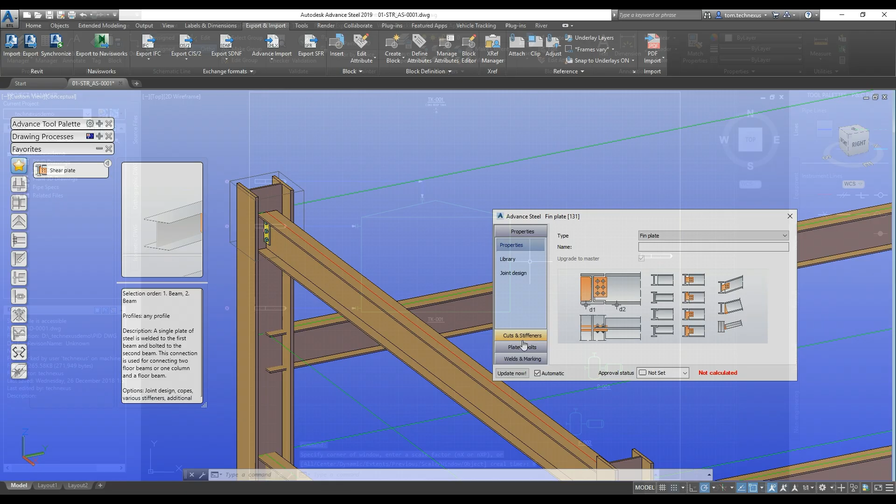So this week is all going to be about piping. We're going to finish off our piping models by the end of the week. We're going to create our fabrication drawings for them. We're going to update our orthos, run them through Navisworks and make sure we're not getting any clashes.

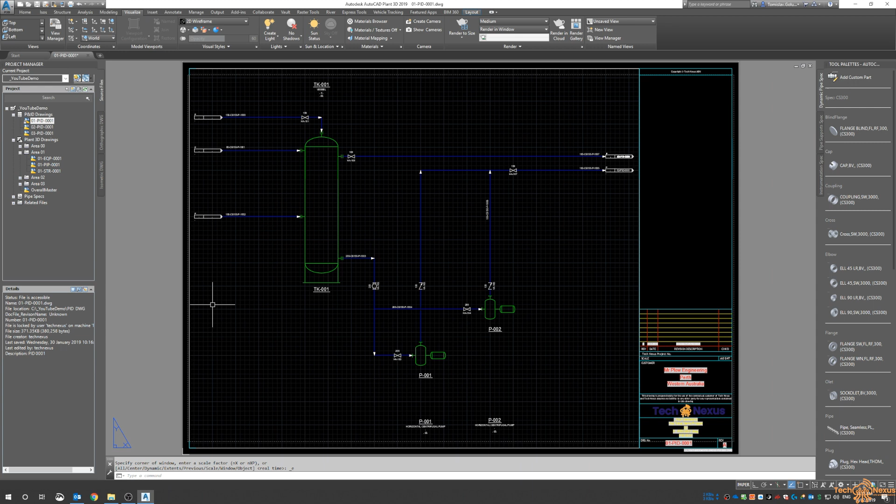And then by the end of the week, we will also update our InfraWorks model just to make sure that it looks right visually where it sits in its real-world location, possibly. So today is all about Area 1. We have our TK001, you can see there on the screen, with Pump 1 and Pump 2. So Pump 1 and Pump 2 have 8-inch suction lines at a spec of CS150, and the pumps are discharging 6-inch lines at also a spec of CS150.

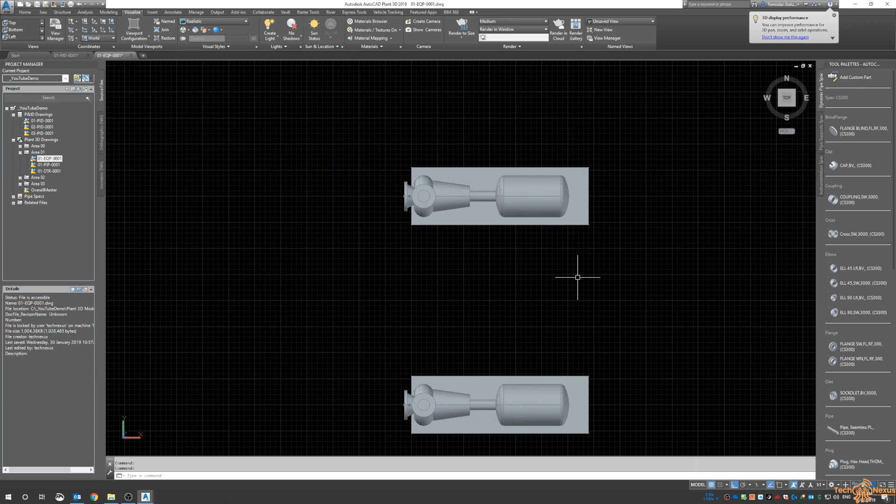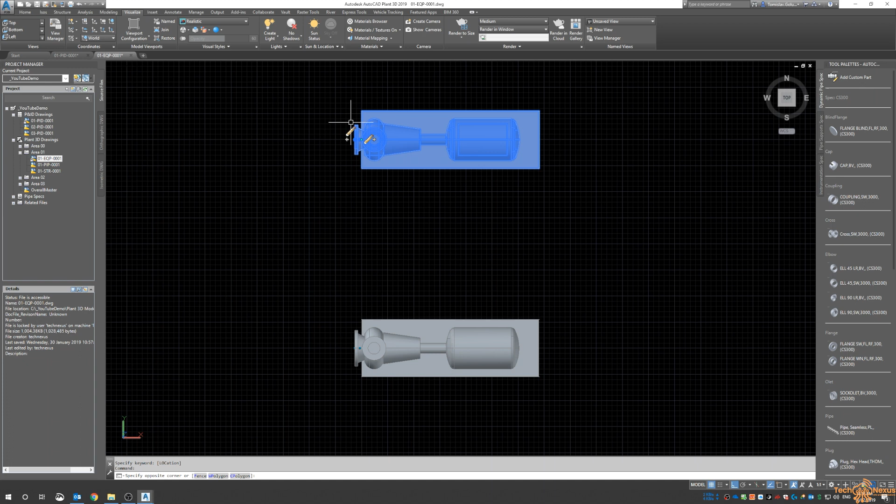So we go into our Area 1 equipment model, and there it is in plan view. So we can just zoom into our pumps here, and we can edit the nozzles. So when you do edit the nozzles on Plant, you select the pump and click on the Edit Nozzle tab, and then we go to our, it was an 8-inch line, CS150, and we have to pick the nozzle. Otherwise, if you don't, it doesn't actually change. So same thing for pump number 2. We call it a 200.

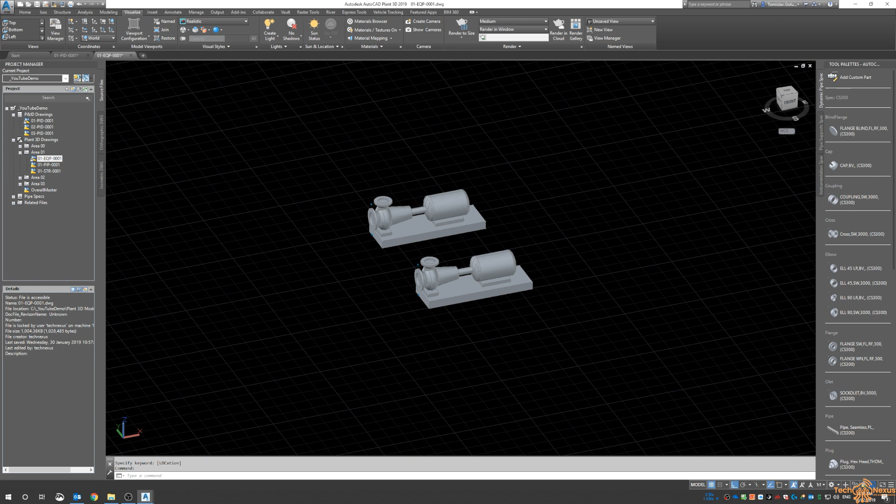And then we do the same with the discharge lines. So they're going to be 150s, raised face. And then the same for this one. They're going to be 150, raised face. So there's our two pumps there with their respective 200 suction and 150 discharge.

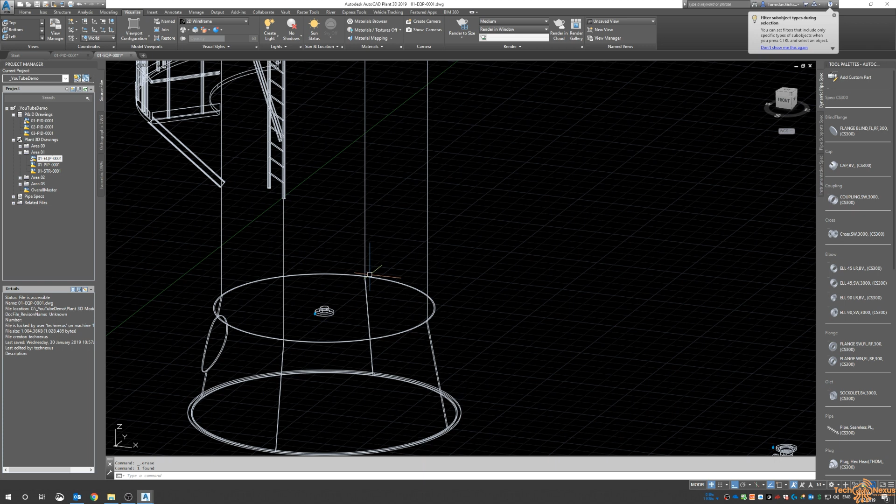Now with the tank or the vessel here, I'm going to change it to wireframe just so you can see. So by default on some pieces of equipment, Plant may or may not place just a couple of nozzles just to start you off, I guess. But we're going to delete those for now because I just want to start from a blank slate, so to speak. So I can control and click the nozzle and I get the little pencil glyph, and then I can just use the delete key on the keyboard to delete it. So also with this platform, I'm not really interested in this at the moment, so I'm just going to remove it.

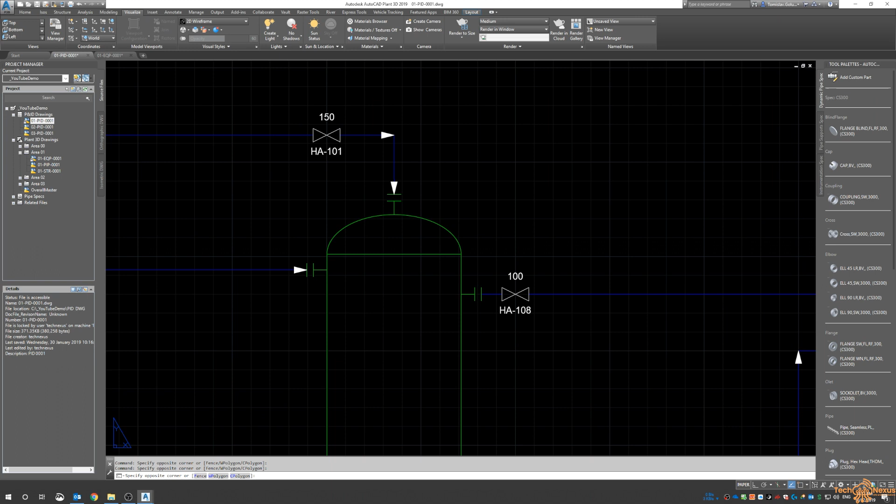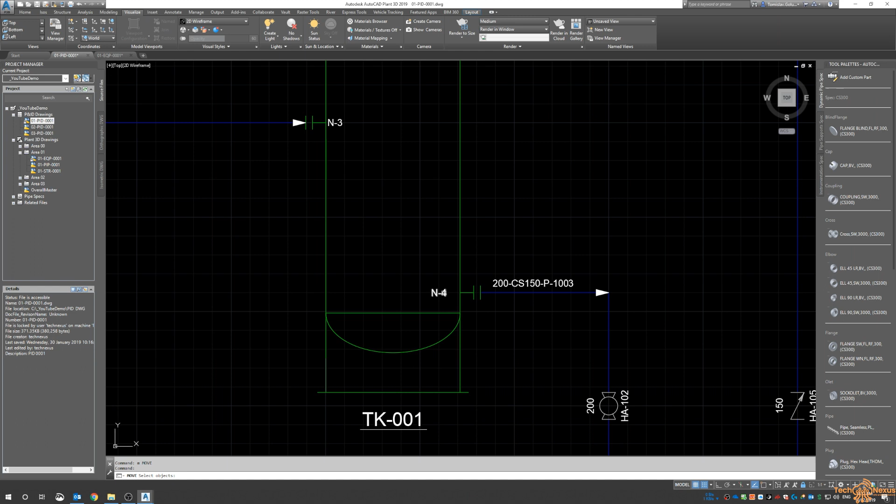So if we go back to our P&ID, we can see that we have 1, 2, 3, 4, 5 nozzles here. So I can also come in and annotate them, and then I will know which nozzles we're dealing with. So N1 is at the top, N2, N5, so these will presumably be N3 and N4. So it looks like I'm obviously just doing nozzles to my own numbering. So when you do get an equipment data sheet, these may already be numbered. So from the vendor, they will know that they're N1, N2, whatever.

Also, generally, you might find, depending on the process and whatever project you're working on, the nozzle elevations will be set, but in plan view, the rotations won't be set because that'll be something that you may decide as a designer, that you want the nozzles to be at 45 degrees, 30, 22 and a half, whatever it might be. So with this, we've obviously just got 5, so 4 on the body, 1 on the top, and when we jump into the 3D model, I will sort of work out where I need them.

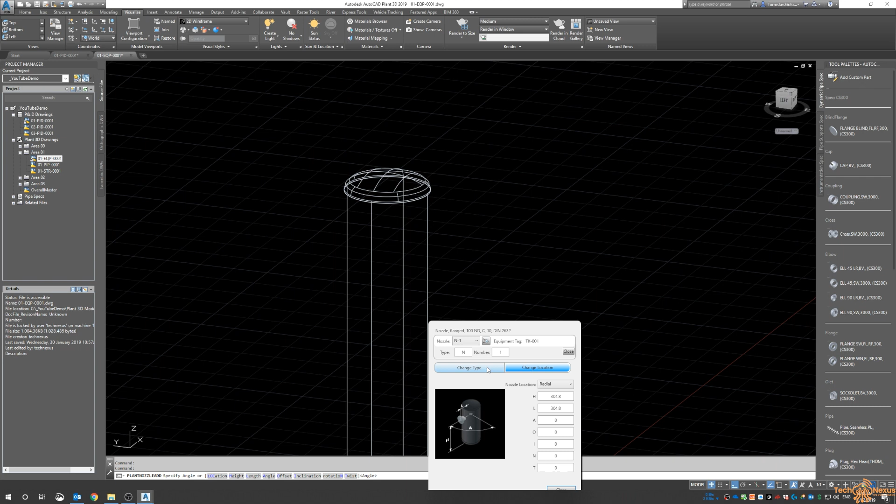So N1 is at the top, and it's a 6-inch CS150 line. So in Plant, you pick the item, right-click, add nozzle, and it's a top nozzle. So the O value, which is the offset, is 0 because we want it in the center. The length, I'm going to make it just an even 250. And it's going to be a 150 and a pressure class of 150 as 6-inch raised face flange.

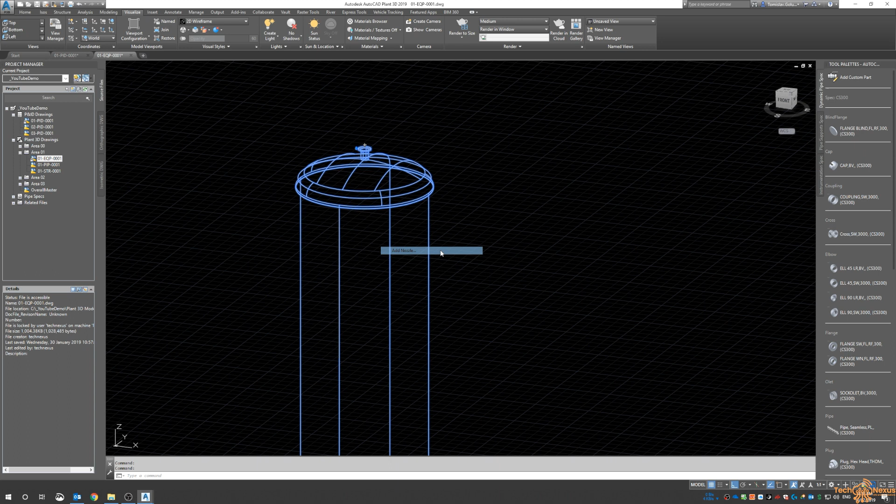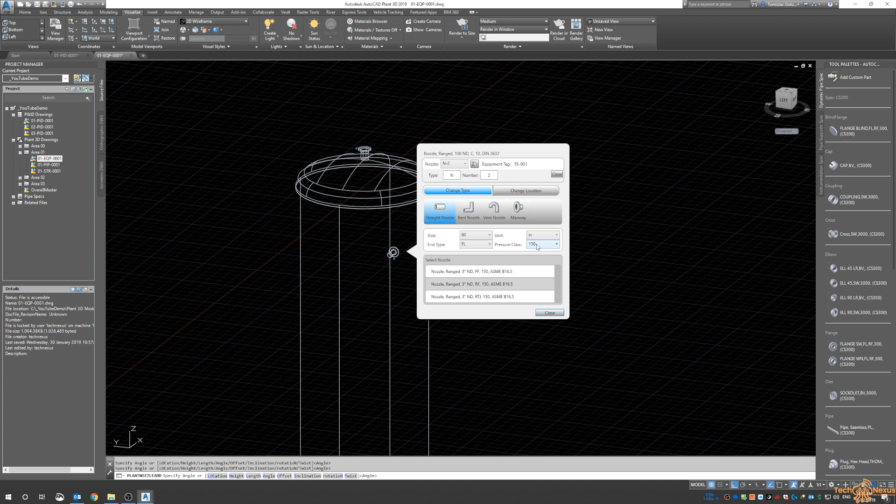So there's N1. So if we go around, N2 is an 80mm line in CS150, and it's near the top. So it's radial, so the height, let's start at 18 meters. Looks good enough for now. And the L, which is the extension from the face of the body to the face of the nozzle, is at 250, and then we know it's an 80mm CS150 spec. Okay.

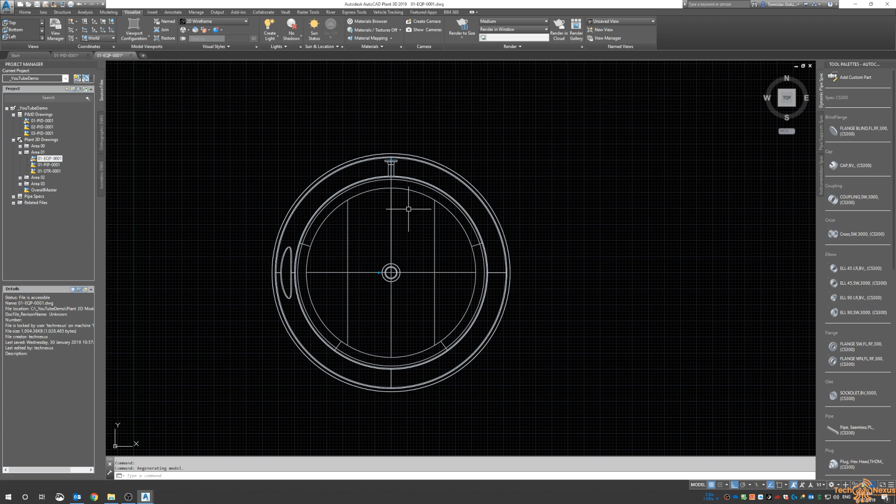N5 is a 4-inch line at CS150 as well, and it's near N2 at the top there. So again, we'll do the same thing. I'll just switch to top view as well. So you can see there's N2. And if I switch to the side, there's N2. So again, I might just modify this just to bump it up a little bit higher too. So let's go to, what does 20 meters look like?

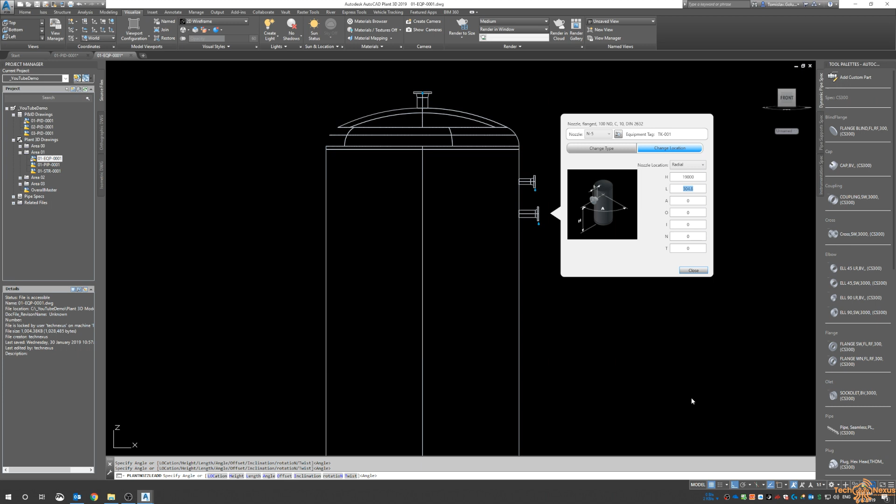Again, you'll be doing this from a data sheet off the equipment vendor. So these should already be set for you. So that looks about right. And then we'll go to N5 and radial again. And this was at 19.5, so N5 is a little bit lower, so we'll make it at 19 meters, 250. And let's push the angle around 180 degrees for now. And this was a 4-inch line at CS150 as well.

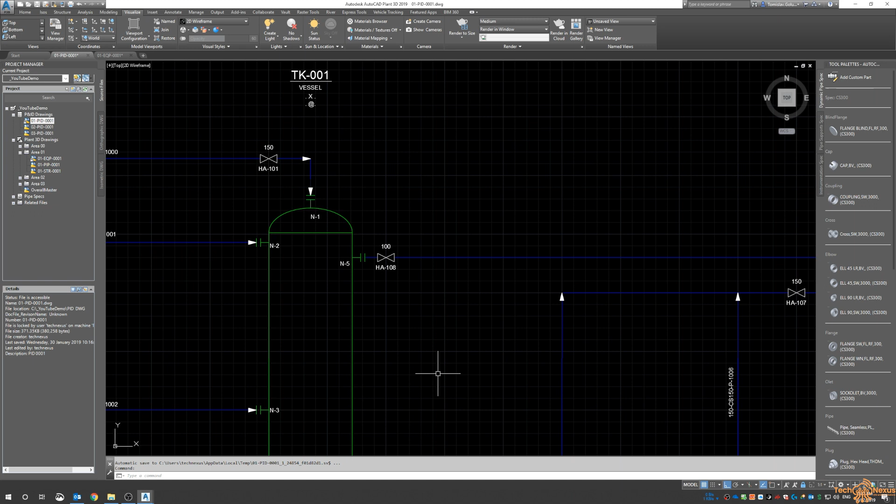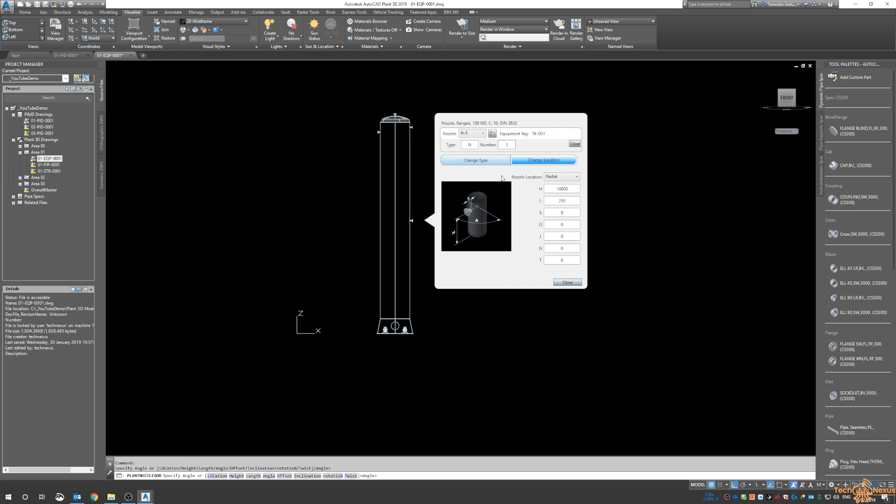So there's 3 nozzles, and then we've got down the bottom N3 and N4. So N3 looks like it's, I don't know, almost halfway up. So it's a 4-inch line at CS150 as well. So N3 will do the same. Add nozzle. Height, let's make it 10 meters. L of 250. N3, and it was a 4-inch line at CS150.

And then N4 is my 8-inch line, which is down towards the bottom of the vessel. So this one shows it as close to the bottom there. It could also be a drain at the bottom of that spherical head there too. So we're not going to do that. So it's going to be add nozzle somewhere down

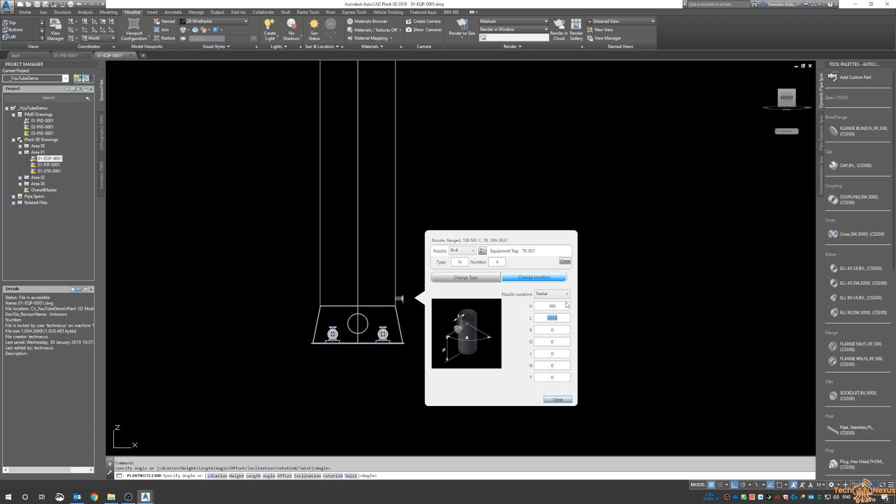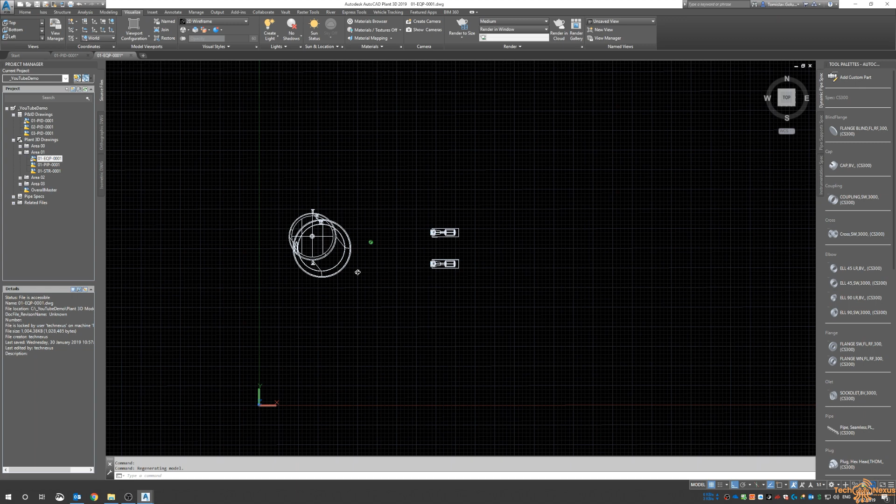300. Let's make it an even 300. Protruding 250. Change type. It's a 100 mil line. Changing the unit to inches. And then there we go. So now with the orientation. So that looks okay for now. But again, we know that this bottom nozzle should be rotated at some point.

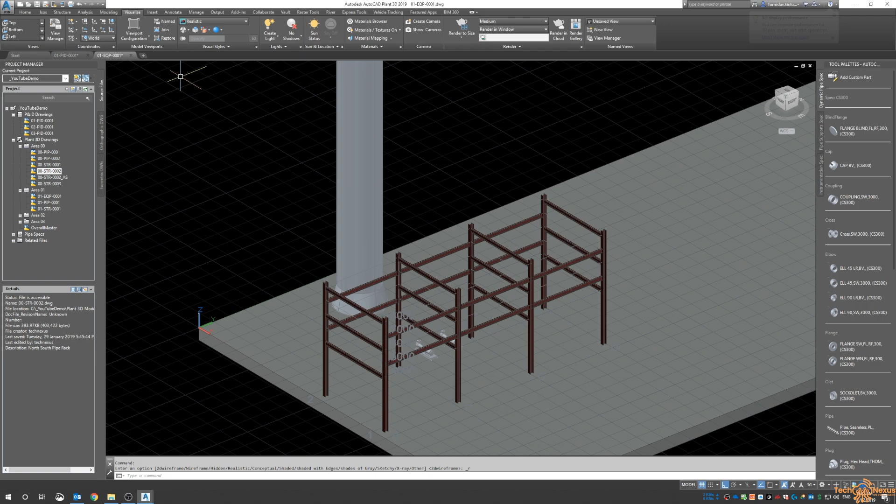So what I want to do is, just to get an idea on how this is going to look in its location, I'm going to XREF in the structural models and then switch to realistic or conceptual. Conceptual looks nicer. There we go. So we've got all of these nozzles up here. So this one is obviously going to be okay. So it's going to come down and get onto the pipe rack.

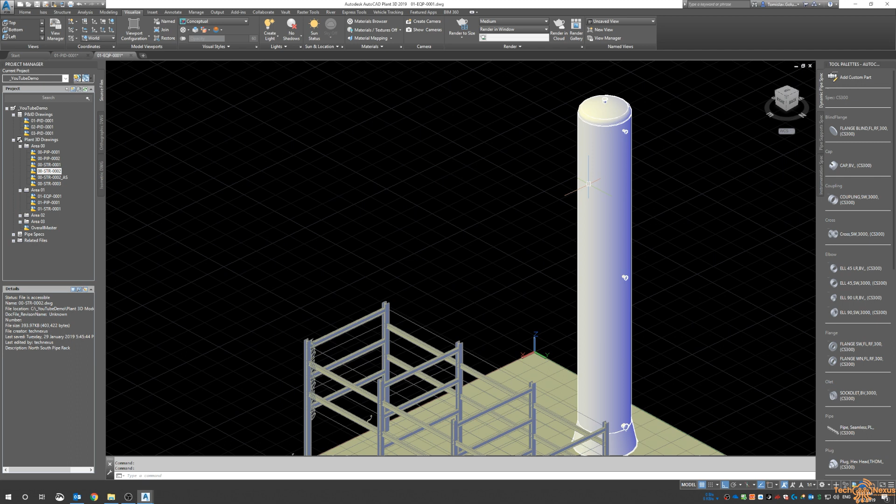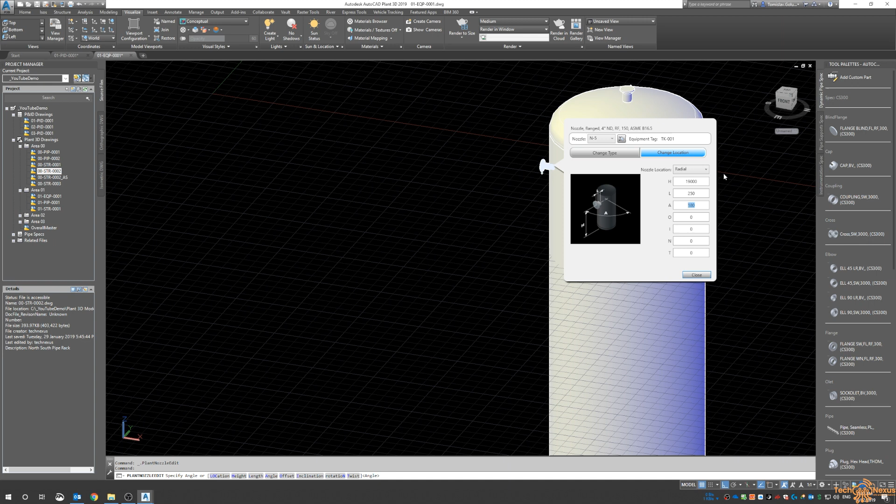These 1, 2, 3 nozzles, we could probably orientate them to be a little bit more accessible to get in and off the pipe rack there. So what I'm going to do is I'm going to change this one to be at an angle of, let's say, minus 60. Okay, that looks pretty good. And then we'll do the same thing for this one. So that will be 60, 90 plus 30, 120. Wrong way. So just come back and change it. So that will be minus 120.

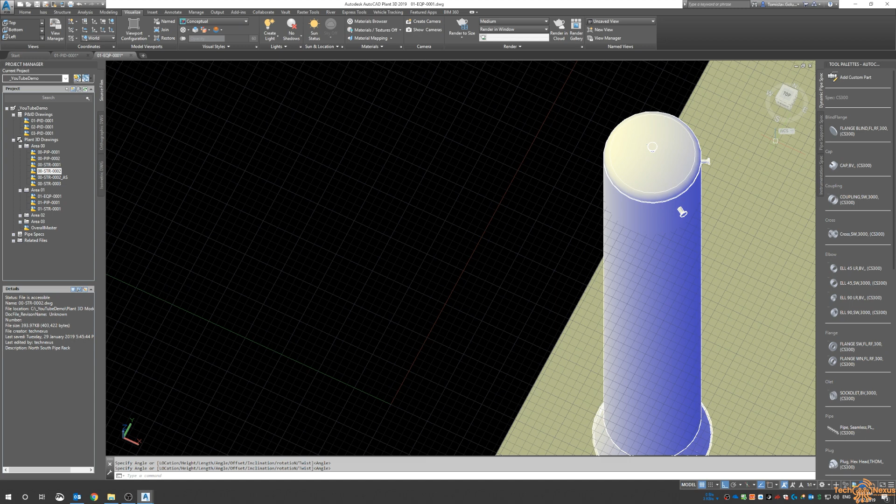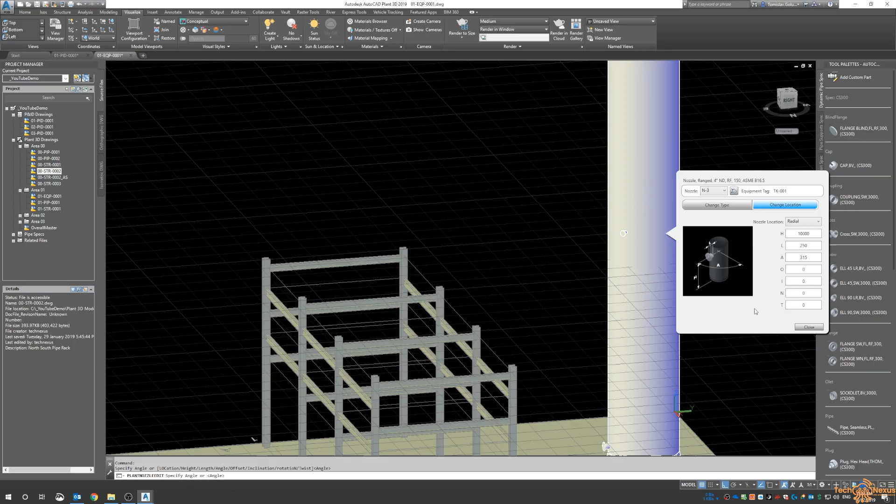There we go. So looking from the top, we've got 2 lines coming off here, and then what we might do is for this bottom drain, same thing, I'm just going to rotate that back around minus 90 degrees, and then let's do this one just for something different, minus 45 degrees. So they're all facing back towards the rack. So for now, in my head, that looks fine. So I'm just going to detach those XREFs again. I don't need them anymore.

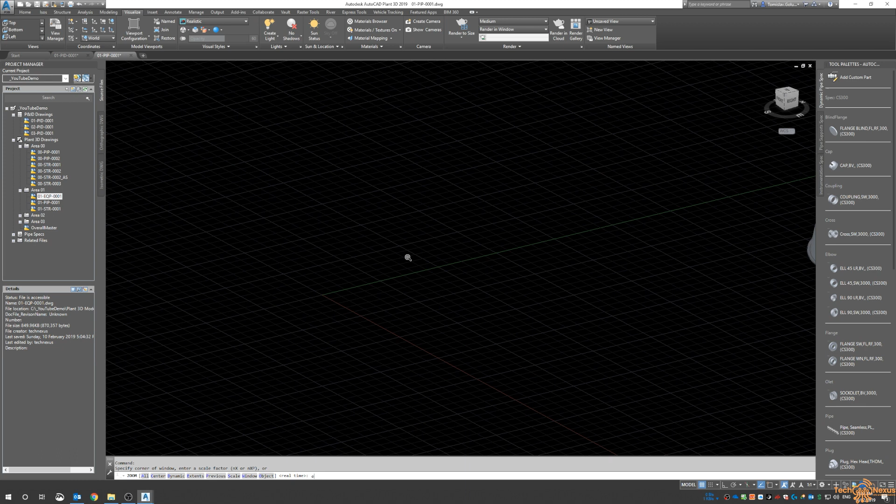And then we're going to jump into the Area 1 piping model. So obviously it's blank, nothing in there. We need to XREF into the current drawing my equipment model, and I'll switch this to be conceptual again, and I'm also going to XREF in the general structural model just so I get an idea on what it's going to look like.

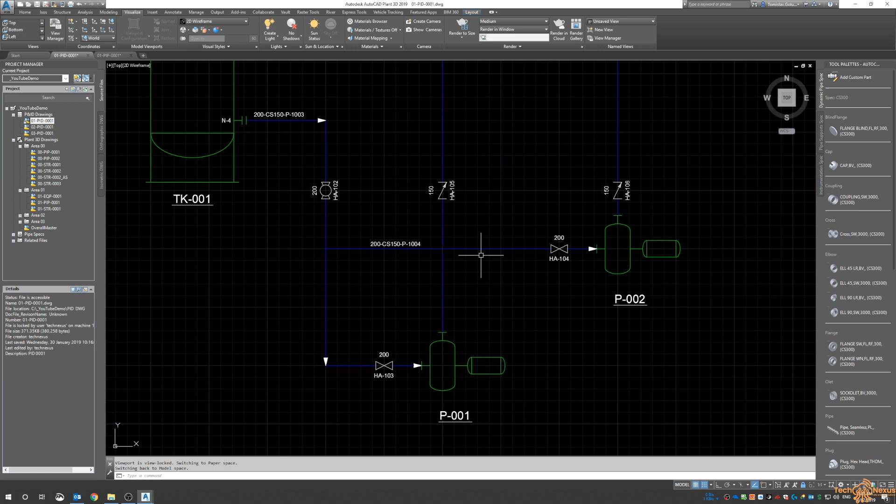So to finish off this video for today, I'm just going to do this suction line, so the drain from the tank going into these pumps. So I know that it's the 1003 line and 1004. So pump 1 has 1003 attached to it, and pump 2 has 1004 attached to it. So which one's which? We can come in here and see that this is pump 1 and this is pump 2, and there's that discharge line.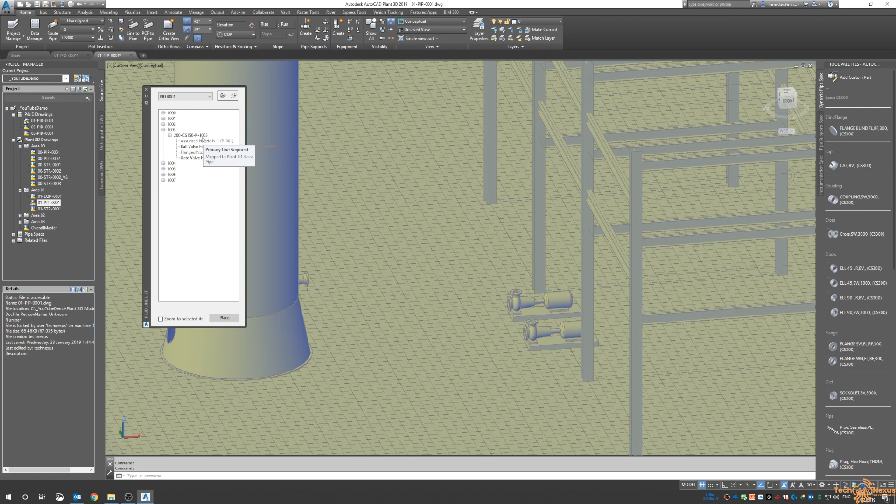So I go to the Home tab, and in the middle, next to the size, there's a button called P&ID line list. So I can pull up that 200 CS150P 1003. So I right click on it, go place. Plant will ask you to map the 200 size in the spec. And then we can run it.

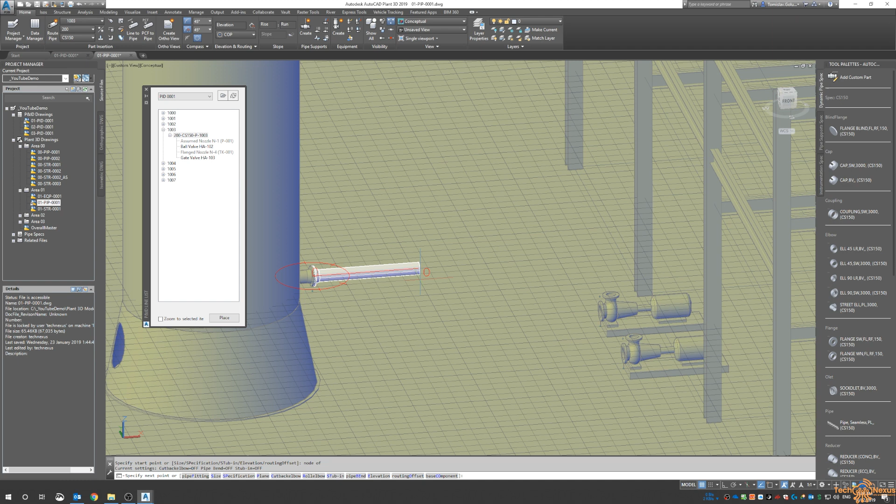Now everything in Plant is a node connection, not a center. So we go from node to node of the pump. And what you'll see there is Plant has got 9 different solutions for that. So down the bottom of the screen, we can go next. So we're at option 3, option 4, 5, 6, 7, 8, 9, and back to 1. They're my 9 options. I like option 1, and I type in A to accept.

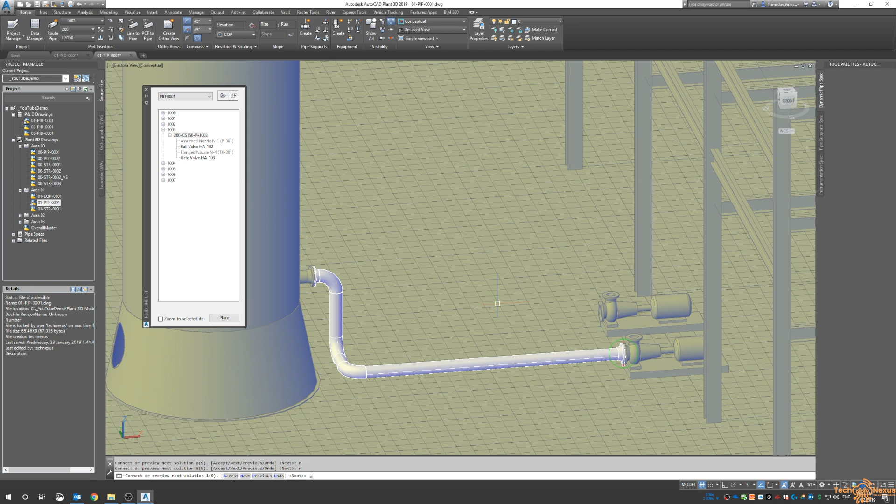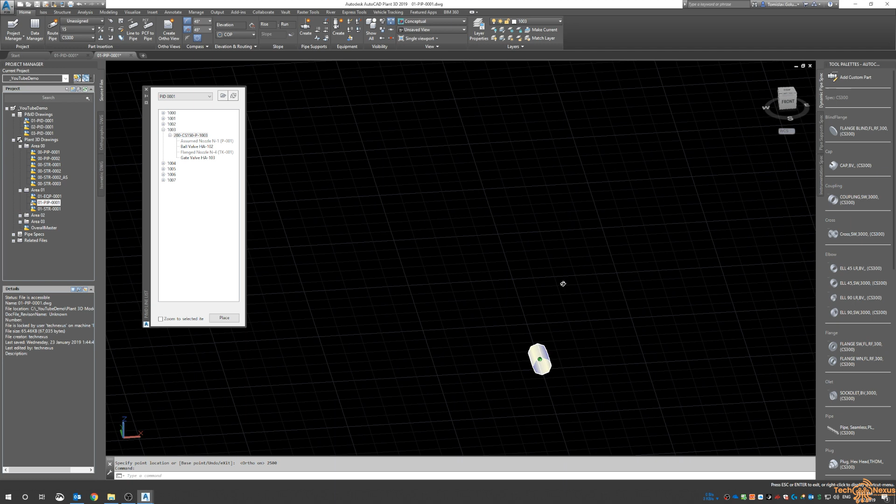Now, this is not gospel. If you want to move it, what you can do is delete one of the fittings, and then I'm going to bring this down. So I'm going to shift this, let's go 2500. So now I can do the same thing. I can just come back and reconnect this pipe. Okay. So to me, at the moment, that looks fine.

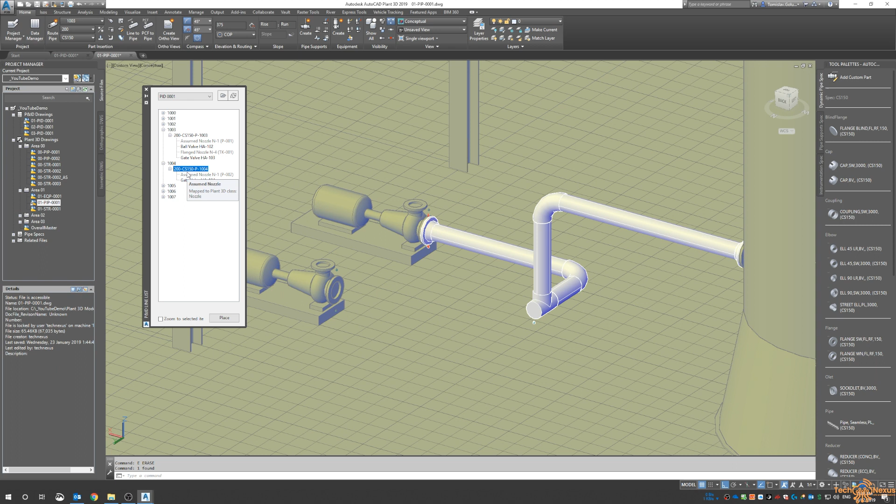Now we need to put the 1004 line coming off here as well. There's a couple ways to do that. I like to change the elbow to a T, and then that way that T is part of the 1003 line, and then I can run the same command. So place item, and then go node to node, and there's 2 options there, but I know that's the one that I want.

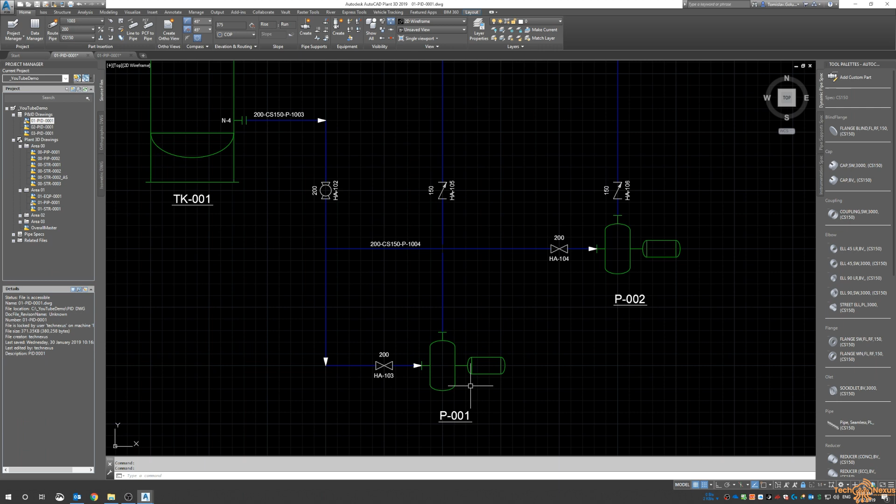You can see there now we've got our discharge line coming out of the bottom of the tank, splits up into 2, and then we can start placing our fittings, our inline fittings. So we've got a ball valve on the main line, and then each of the pumps here have gate valves on them. So again, you just go right click on it, place item, and for this exercise, I'll stick it in the horizontal up here, and the valve operator is up.

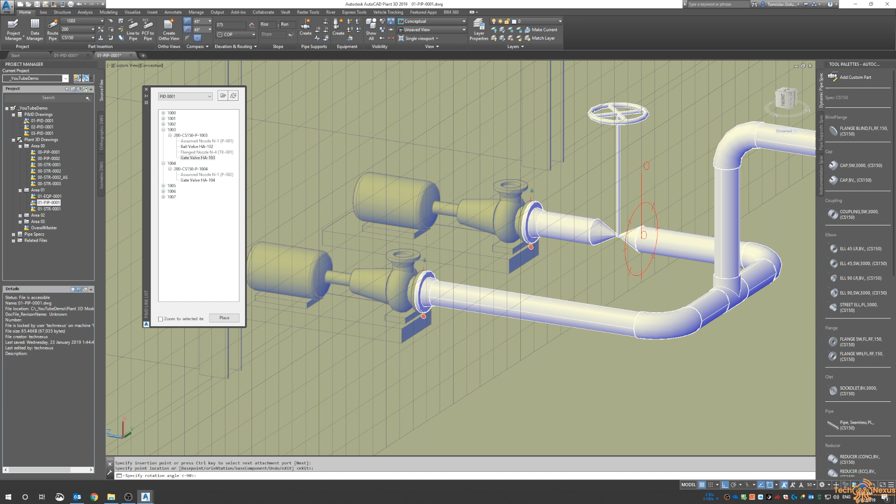So all of this will check and change possibly even later as well. So for 103, the gate valve, it's going to go up, and for 104, the gate valve, it's going to go up there as well. So we know that this spec has 2 different end ratings for those valves, so I'm going to change them to be flanged valves. Your spec will probably have these already set up as well.

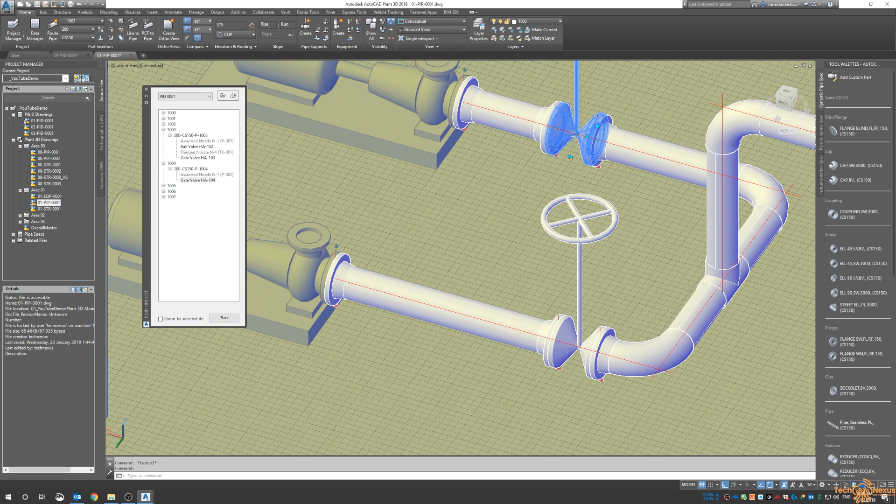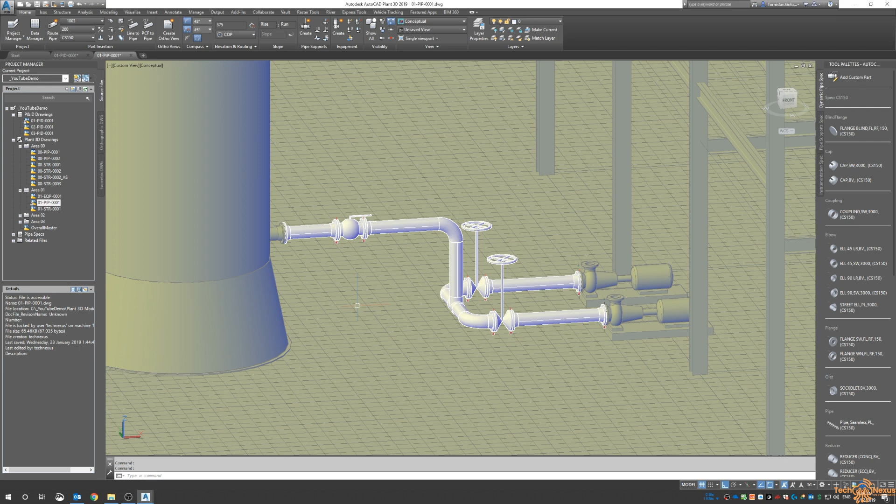And just to make things look nice and neat as well, let's say I'm going to move this down, and Plant will automatically just drag the valve down as close as it can, and then place the flange hard up against that elbow there. So again, this is not gospel. This will evolve in time as I get more data in regards to access, if we need to walk around it, do we need to change it, and whatever else.

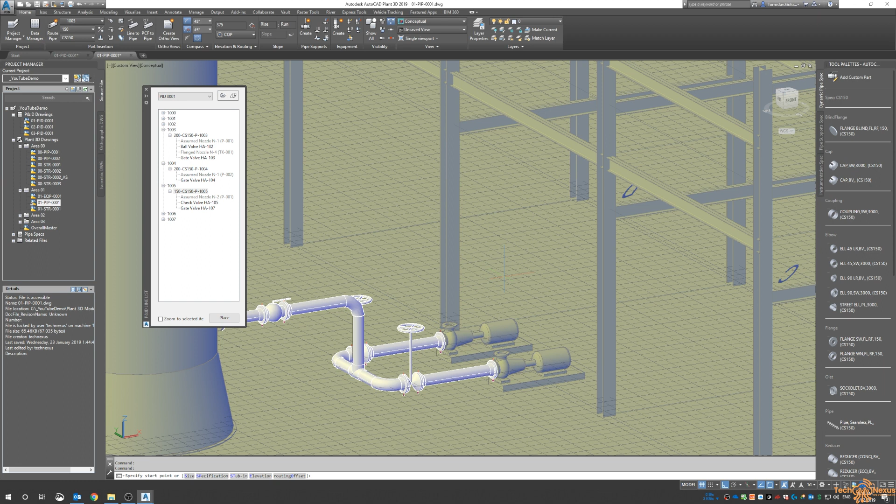So just to finish off this video, we're going to do the 6-inch line. So coming off pump 1, we have line number 1005 and line number 1006. So pump 1 has line number 1005. So this is the way I like to do it, is place item. So again, we're just mapping that 6-inch line, and type in node for discharge, come up, and again, you don't have to do it this way, but this is how I like to do it, and I arbitrarily place these lines in some area that I think I know where they're going to go.

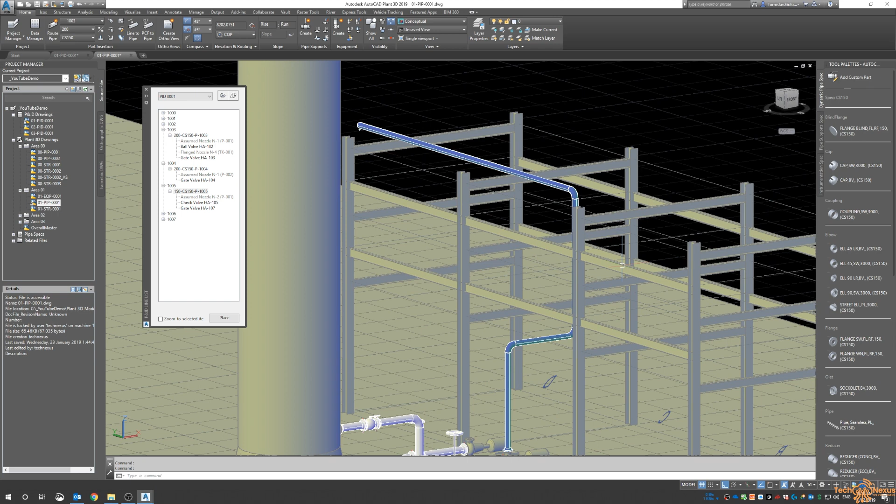Okay, the reason for this is because in Plant, if I get an idea of the level of this steel, the steel's sitting at an elevation of 5,000, so 5 meters up. I can click in here and click on the elevation tab there, and I can also drag it up. If I zoom out, I need the dynamic inputs on.

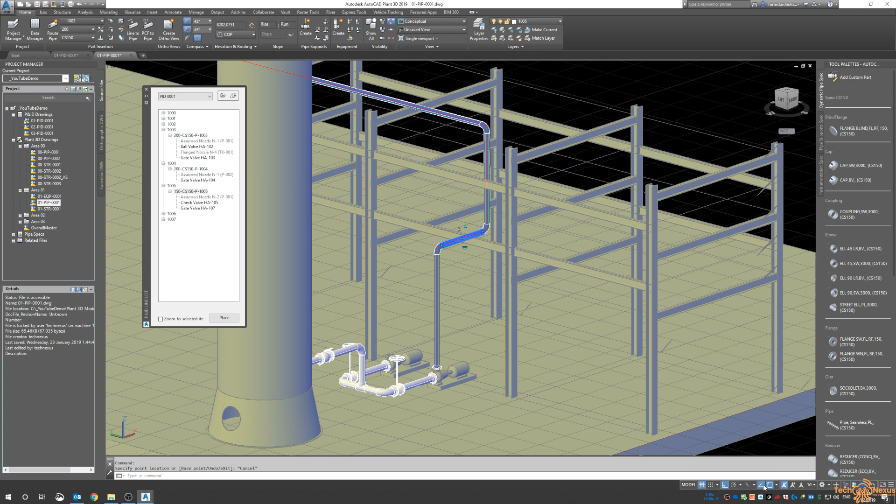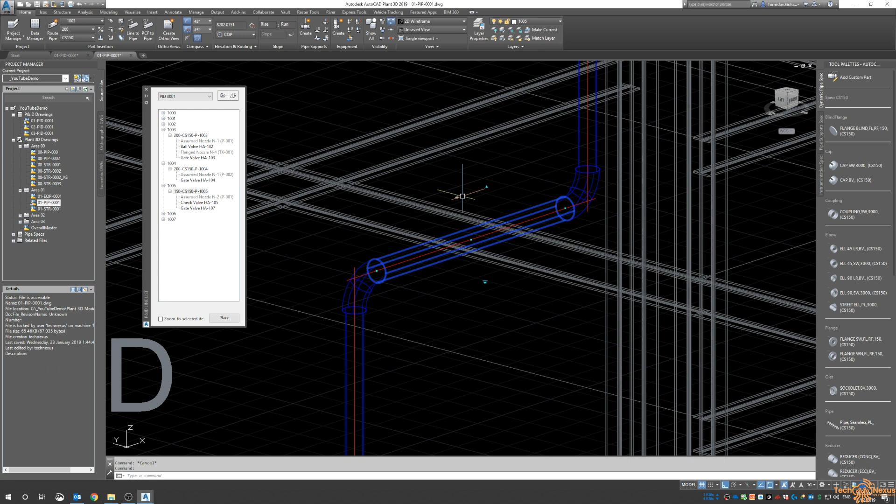Where'd it go? Where did my dynamic input tab go? So it needs to be, we need to snap from this level. F12, there we go. My F12 needed to be on. So I know that this steel is sitting at 5 meters.

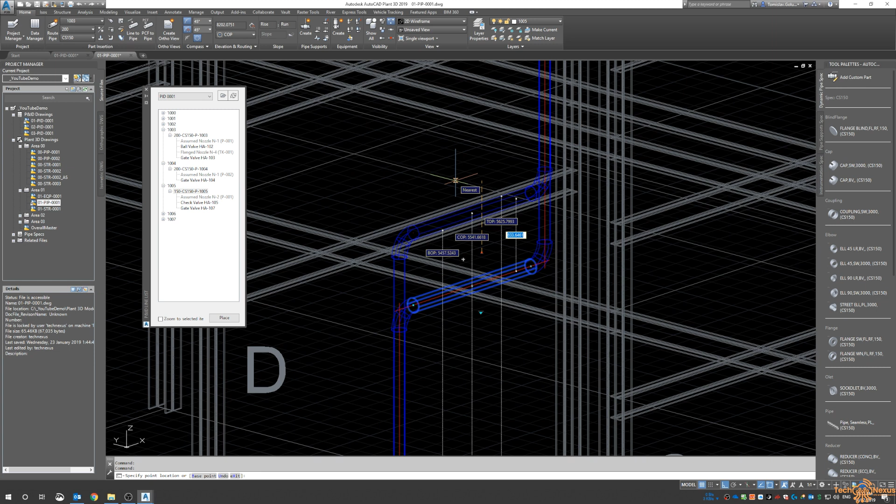So then when I do come in here, I've got the option to change which: center of pipe, top of pipe, bottom of pipe. So my bottom of pipe is at 5,000, but I know it's going to have a shoe on it or something that's 150 mil high. So we know the bottom of pipe is going to be 5150. So then if I change that, where's our cube? So if I switch my view cube over to the right, then you can see that this pipe, the bottom of it, is 150 mil above that steel member there.

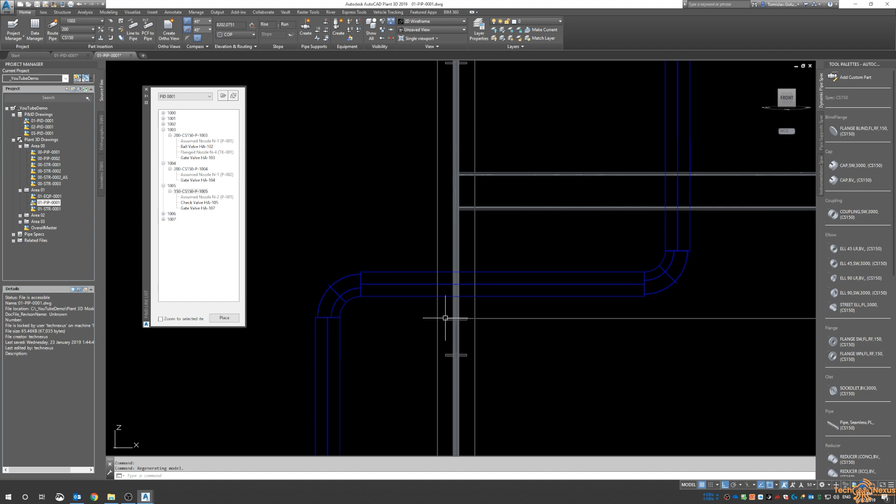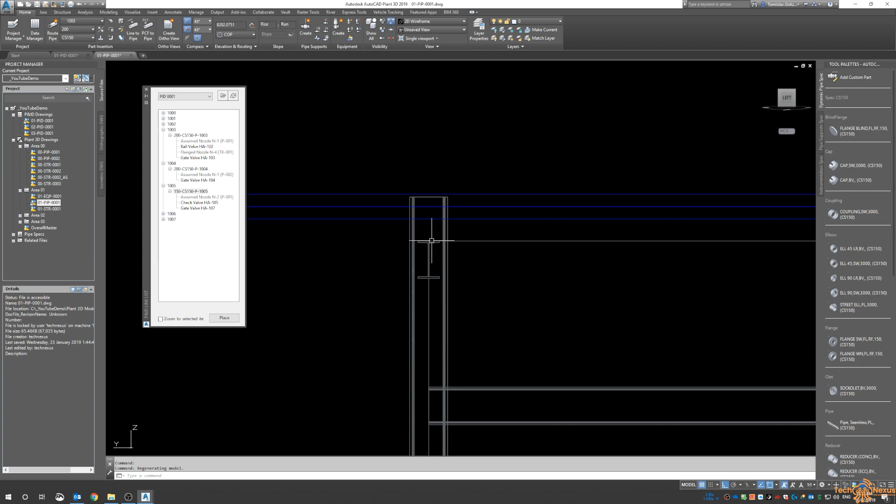So if we do the same with the other length of the run, it's at 8,000. So we'll do the same thing, pick it, change the elevation. So bottom of pipe is 8,000, but it'll be 150 mil up. So it'll be at 8,150. So if we look from the left, again, the same, that's going to have a shoe on it sitting on that structural member there.

So we can also run now the other line, so 1006. So there's a couple ways to do this, but this is just one of many. So place item, go from a node, come up, and let's come up 3 meters. And then I'll control right click and type in perpendicular. And then there we have those two lines.

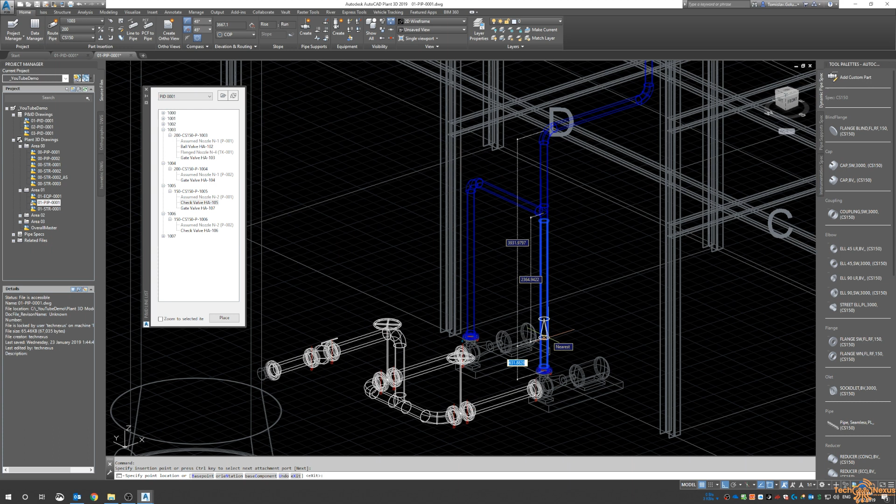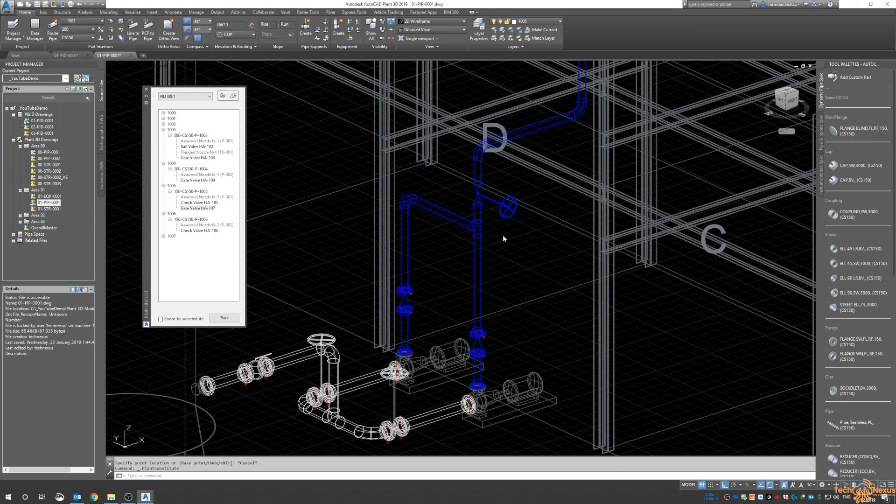So now we have two check valves coming from P1 and P2. So P1 and P2 check valves is HA105. And again, you can type in the values there. So I'm just going to do nearest for now. And I'm also going to change that to be a flanged one. And then 1006, change it to flanged. And then at some point, we need to put in the gate valve. Okay, so again, part of this exercise is that you will be managing and manipulating all of these.

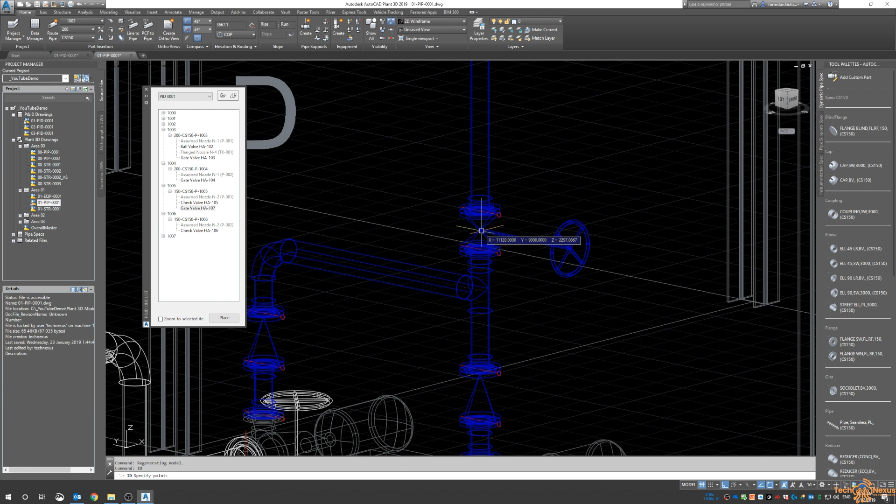So what we can do is also, again, we can shift these down, and we can shift this branch down, and then we can end up shifting this valve down as well. So it just means that from an operator standpoint, if we ID this elevation, it's at 2297, so it's enough for someone to walk under, but it looks like it could be low enough for someone just to reach up and rotate the valve operator if they need to. But again, these sorts of things you'll massage through the ongoing evolution of your design. So that covers area 1 for today.

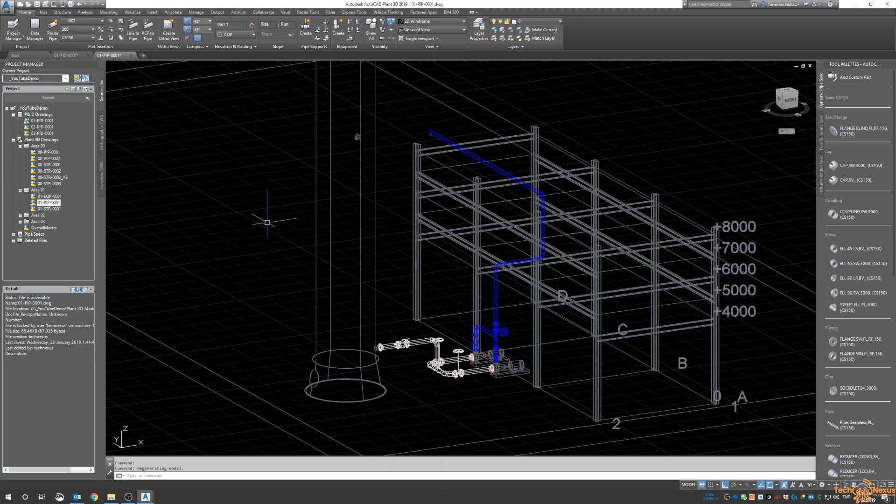And by tomorrow's video, I will have finished area 1. And then with area 2, we'll get stuck into adding the lines for this tank and then coming again back into a couple pumps and out our rack.